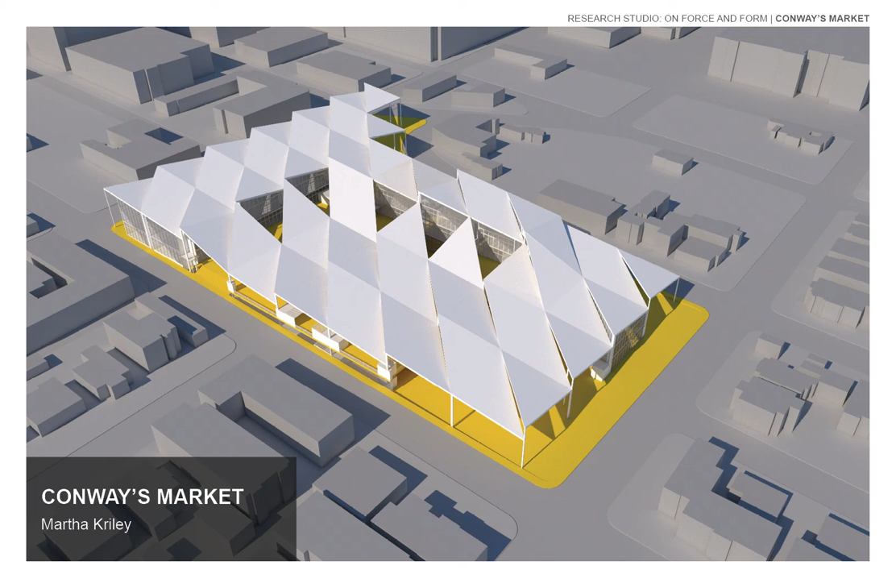Hi, my name is Martha Kriley, and this is my project for On Force and Form, our one-year research studio with Heather Roberge. This project explores spatial variety within seriality. By working with repeated modules, a wide variety of spaces and configurations are generated.

Structure and roof modules generate two spatial orders, the former orthogonal and the latter diagonal. Louis Kahn often divided program into a binary of servant and served spaces, with structure and servant spaces often commingled. He showed that if you expand structure sufficiently, it can become programmed poche and help establish a relationship between support

program and occupiable space. For example, the tectonic system at the Yale Center for British Art also serves as mechanical space, while at Trenton Bathhouse, the expanded structure contains support program.

For my project, the structural module is a 72-foot square with columns placed in each corner. Instead of occupying the minimum space required to support the roof, each column expands to a different size, creating occupiable poche space within and forming a dynamic spatial bay.

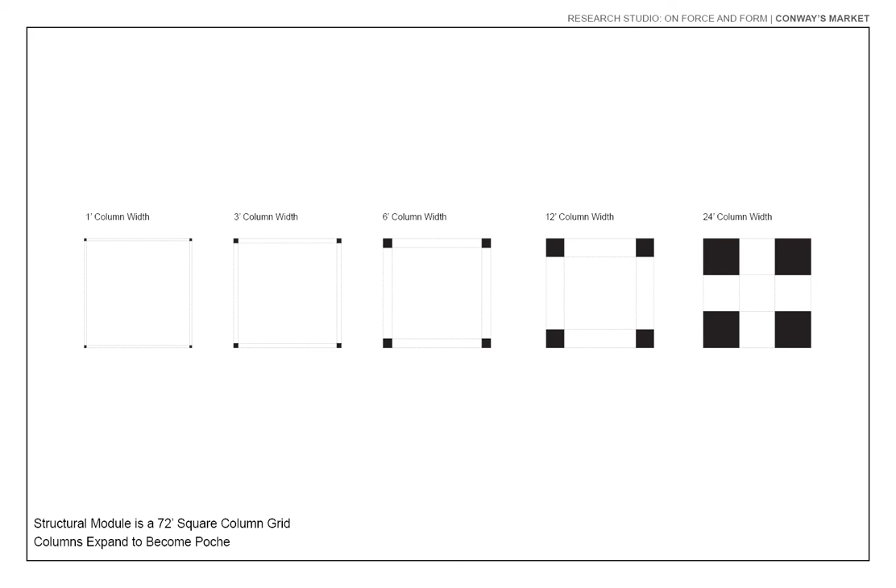There are a total of 5 structural modules, with poche columns ranging in size from 1-foot square to 24-foot square, allowing for a range of functions from those that are purely structural to forming occupiable spaces of varying scales. As the modules aggregate to create the field of the market hall, adjacent columns combine to create entirely new figures. The original column module dissolves, and new complex clusters are formed.

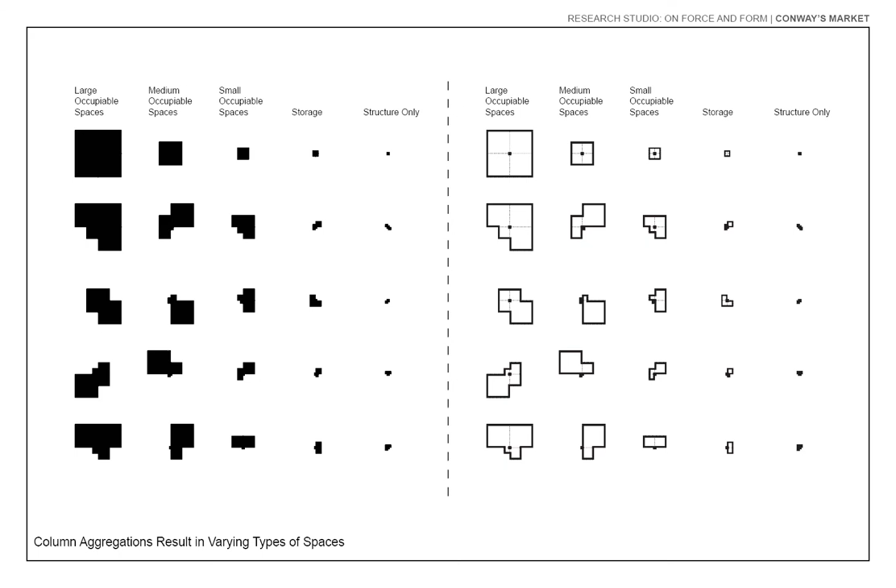My proposal for a market in Hollywood demonstrates that poche does not need to maintain Kahn's strict binary and can instead form a bistable relationship. It uses the shape of the poche and its containment of the program to organize interactions. At times, the poche object can act as a corner and defer to the market space, or the poche object can become the focus. Unlike Kahn, the space is not always the figure.

The roof of the market utilizes the same 72-foot column spacing. The roof planes are lifted above the poche column figures, supported by thinner columns to add lightness to the structure, similar to Kahn's Trenton Bathhouse. There are 2 roof modules based on permutations of a butterfly roof. Aggregating these modules allows light to permeate into the space from two directions, producing dual lighting effects and porosities.

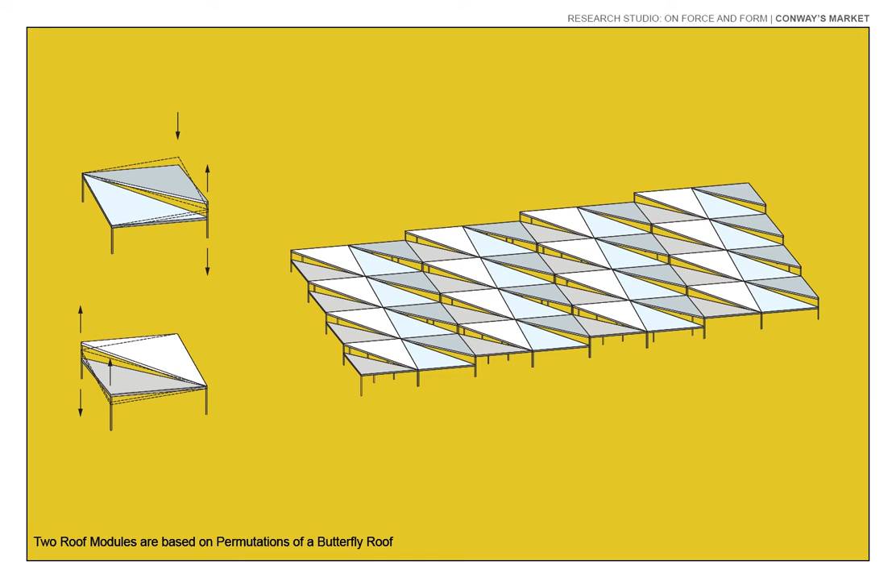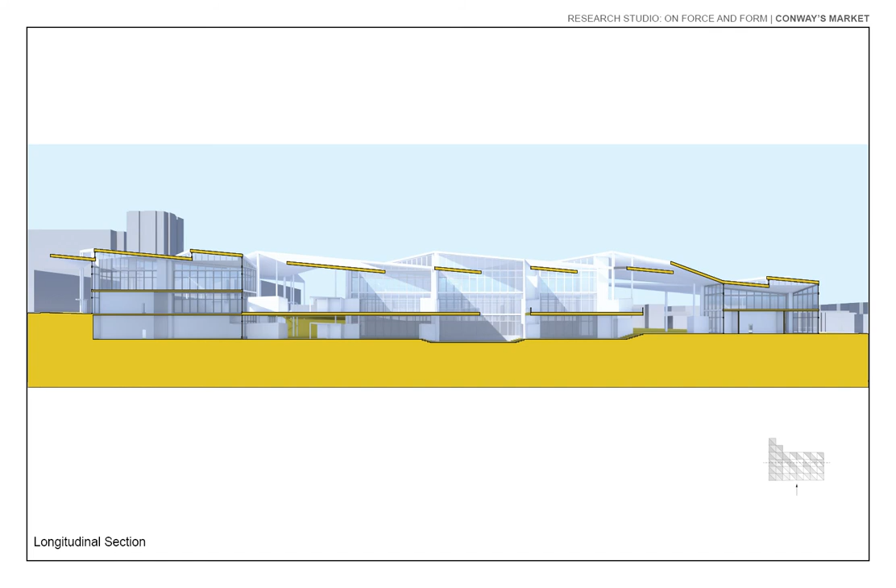The proposed market occupies a large site, with commercial zoning to the north and east, and single-family zoning to the south and west. The program combines elements of an open-air market, as well as a town hall. The site elevation shifts by 1 level, with the north being 15 feet higher than the south. Consequently, visitors enter the site on the 1st floor on the south, and on the 2nd level from the north. The plans are organized with the town hall primarily placed along the north and east commercial-facing edges of the site.

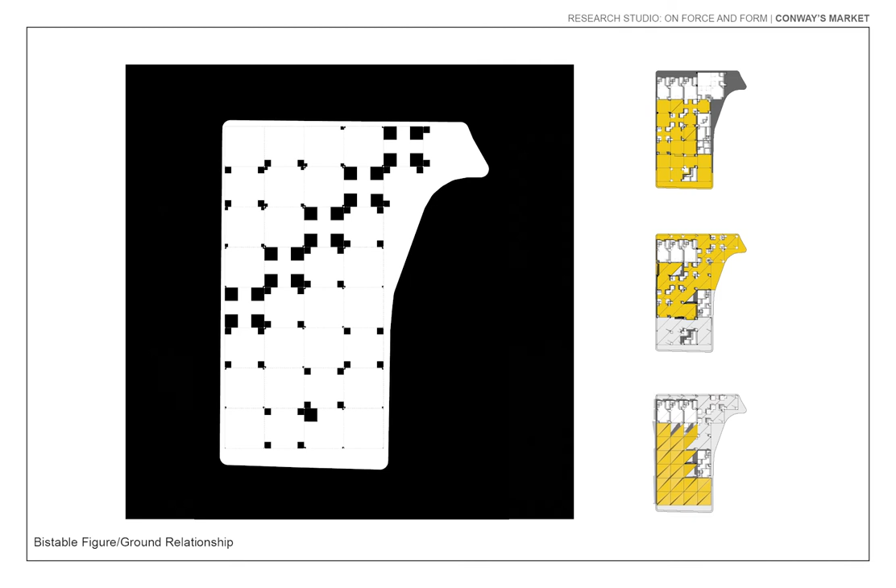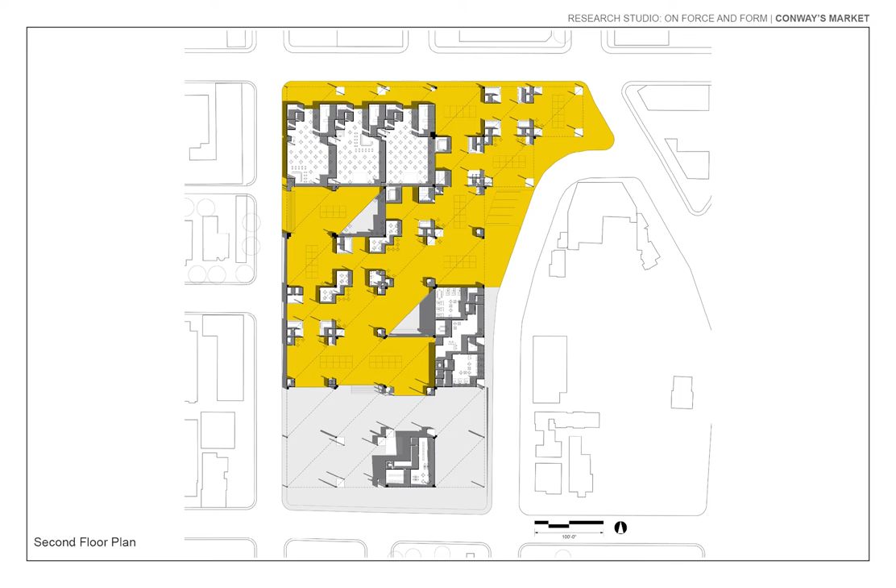In plan, the column aggregations create dynamic bistability with the spaces they define. Bistability occurs when a system has multiple stable states or perceptions. Here, the column aggregations sometimes become objects with the surrounding space acting as the field, while at other times the space becomes figural and the aggregations are the background.

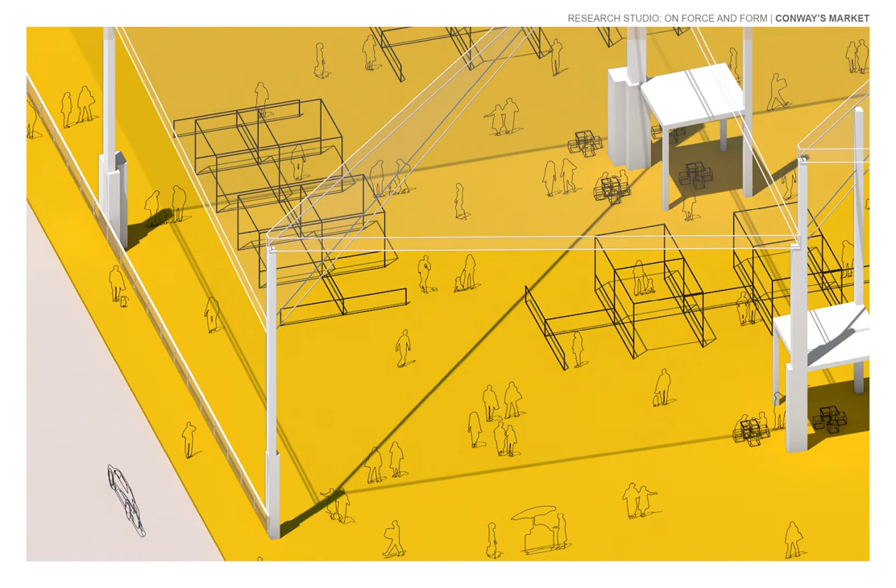In contrast to the orthogonal column grid, the butterfly roof is organized along a diagonal grain. This reinforces the reading of the columns as independent figures within a field, rather than dropping into the background as an abstract series. The grain of the roof encourages non-orthogonal movement through the market, which is further encouraged by strategic placement of column modules in program.

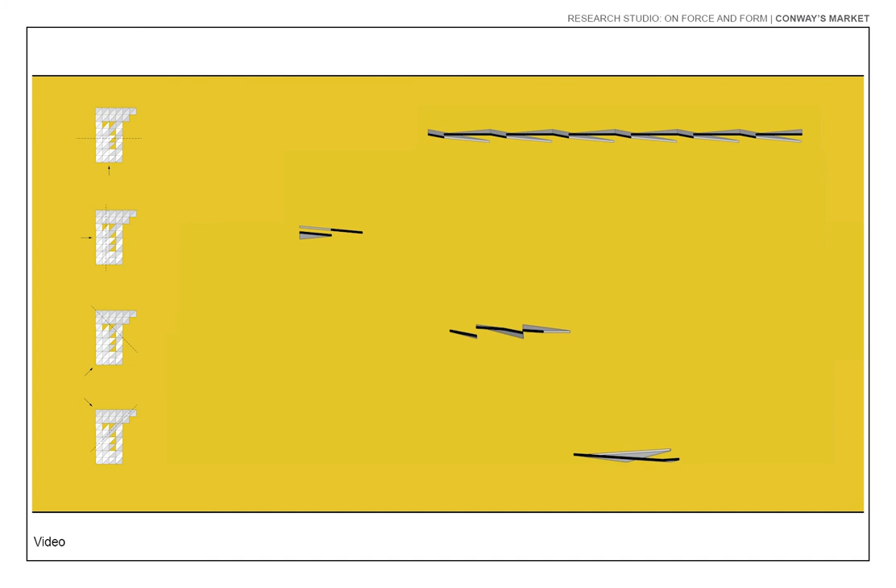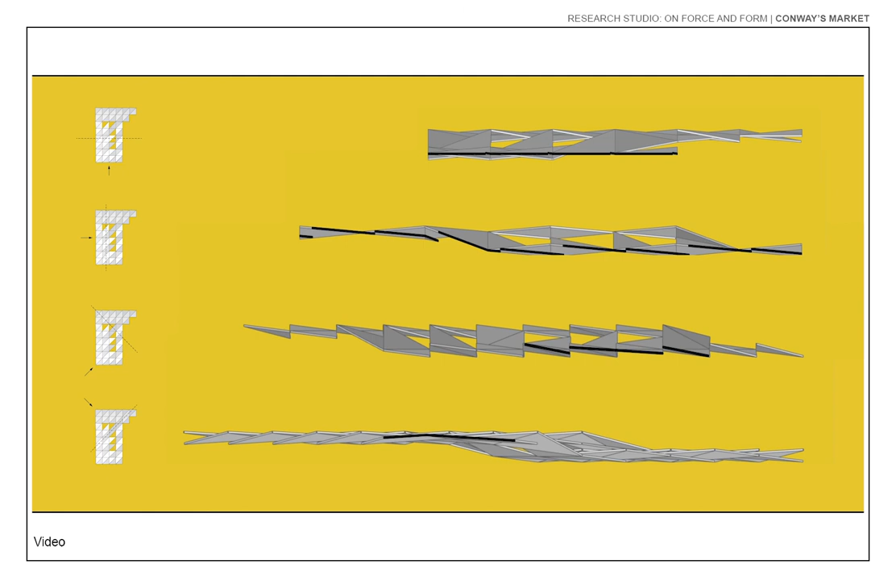Moving sectionally, the roof can be read as a series of small discontinuous panels or as long continuous planes. From the southwest, the roof appears continuous. From the northeast, the discontinuities are revealed. These dual readings create different effects within the market.

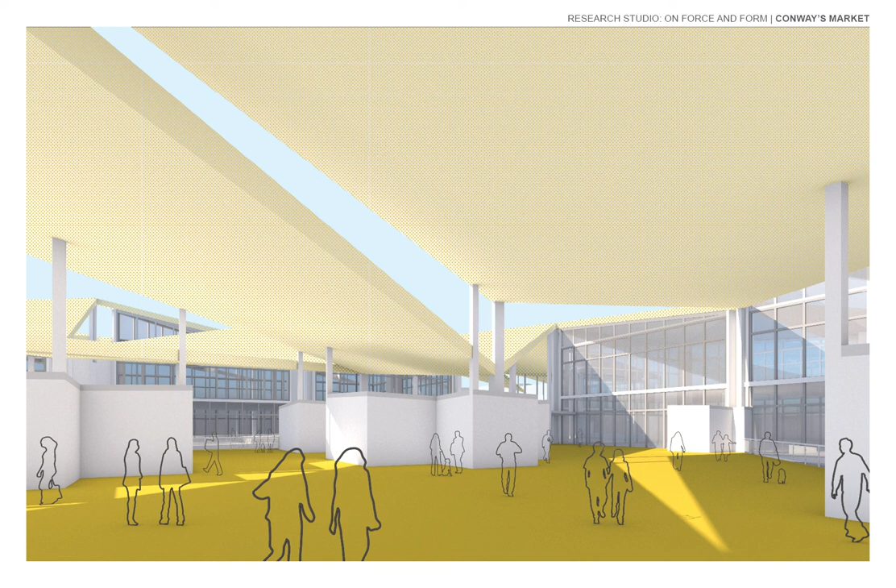The discontinuities help with daylighting and climate control. The north-facing openings allow sunlight into the space, while shading visitors from harsh light and heat. The roof also helps orient visitors by providing different experiences depending on orientation.

Through the layering of multiple hierarchies, the market produces non-hierarchy. The visitor does not defer to a single imposed order. Through bistability and duality, many forms of occupation unfold.